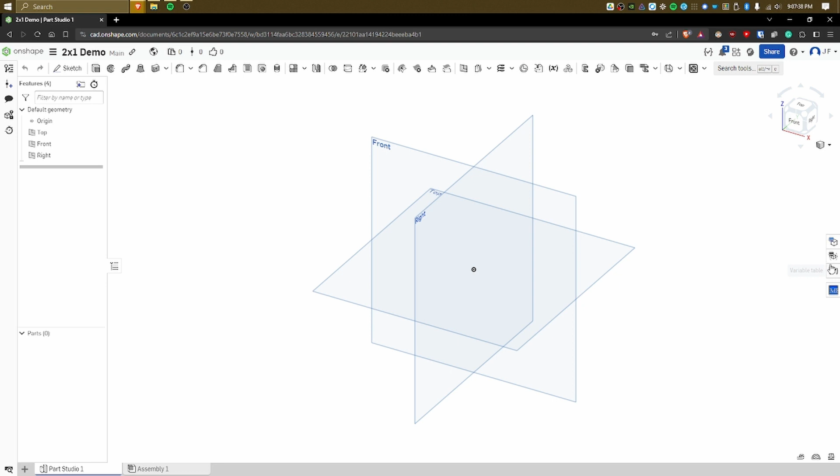The first thing I'm going to start with is coming over to my variable table. I'm going to create three variables: one for width, one for height, and one for length. Now the length, you need to change this to any, and for now let's just say 12. The width, since we're drawing a 2x1 right now, will be 2, and the height will be 1.

And if we want to switch this to a 1x1, we can easily just hop in here and it'll regenerate, and we can make configurations and all that good stuff.

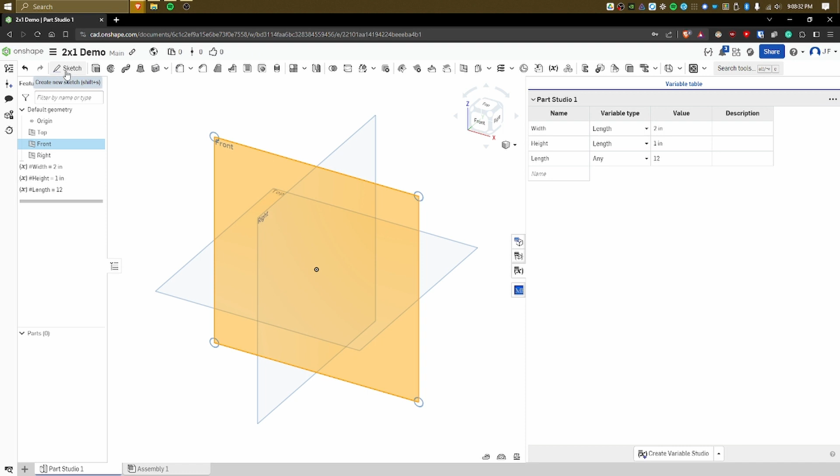So I'm going to start with my front sketch, select it, and hit Shift S or the sketch button in the top left corner, and go with a center point rectangle and draw that out. When you're drawing a 2D sketch, it's a lot easier if you view it normal or perpendicular, so just hit that.

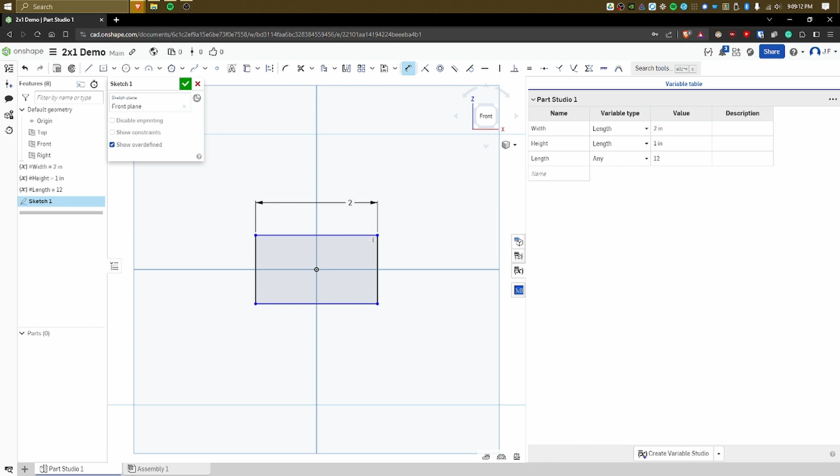Next we have blue lines, so we want these to be fully dimensioned and then they'll turn black, that's how we know everything's fully dimensioned. Hit D on your keyboard, or use the dimension tool at the top, and select the top line. Remember to keep your dimensions neat, you don't want them stacked up, you want them visible.

Okay, now I have all black lines, but now we need to make this a tube and not just a solid extrusion, so I'm going to hit escape to exit the dimension tool.

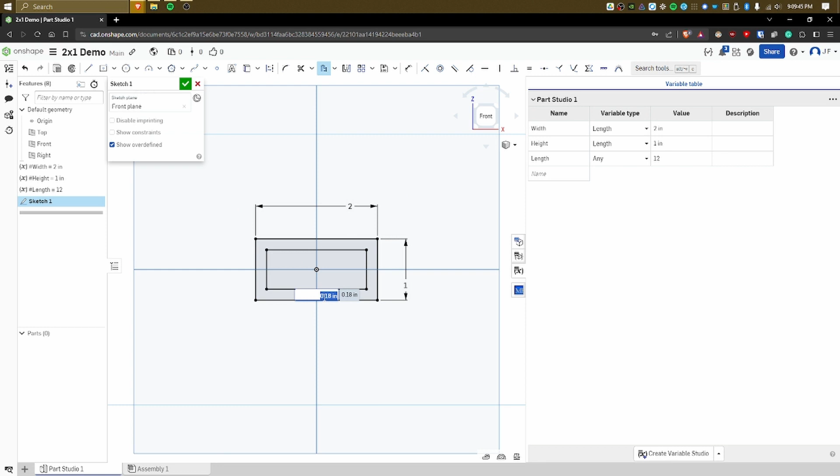Select all four sides and then hit O for offset. Put it on the inside, which is where we want, but if it's on the outside just click this arrow, or you can click and drag to fine tune, and enter in your dimension. We're going to use 1/8, so that's 0.125, and there you go, all your lines are fully dimensioned and black, so you're good.

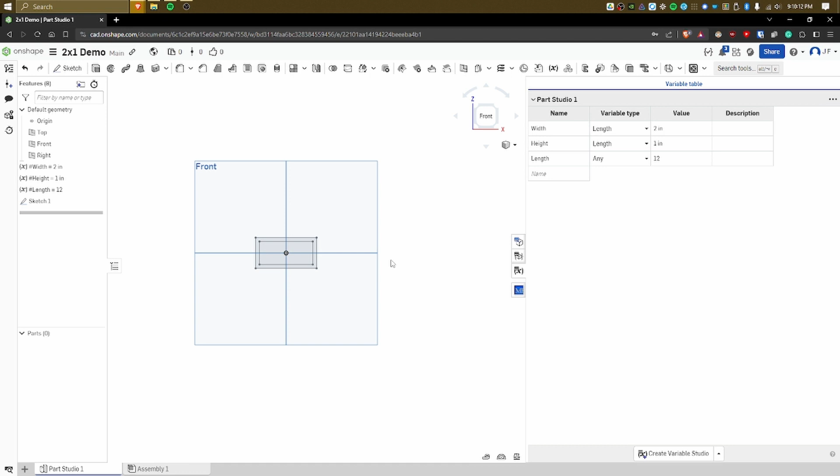Again, I'm just going to pull this out so that it's clean. Okay, all our lines are black, we're fully dimensioned, you can hit the check mark on the sketch. Now what I like to do is hide the planes, so you can press P. And if you want to view it full screen or zoom to fit, just hit F.

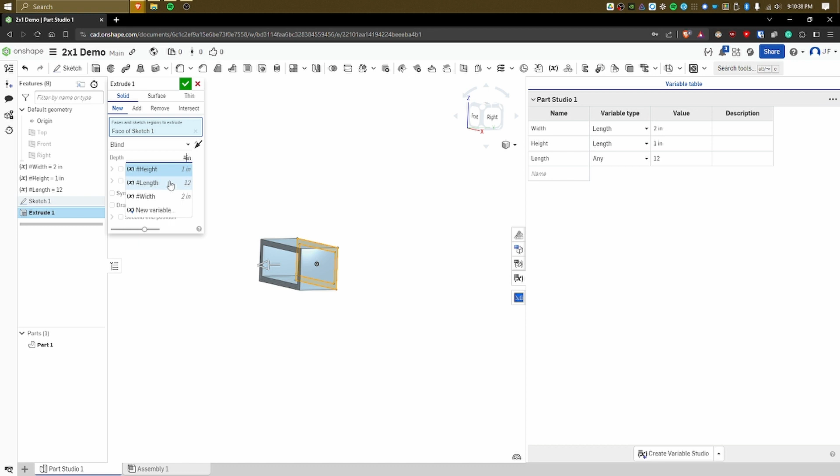Next step is to extrude, that's Shift E, and we're just going to select the outside face. Instead of giving it a hard-coded dimension or depth, we're going to put in a variable. To use a variable, you put the pound sign or hashtag, and then go length. Hit check, and that will automatically update it to 12 inches.

Now if we come over here to our variable table and type in 18, you'll see that this extends. We can go 3 inches, there you go.

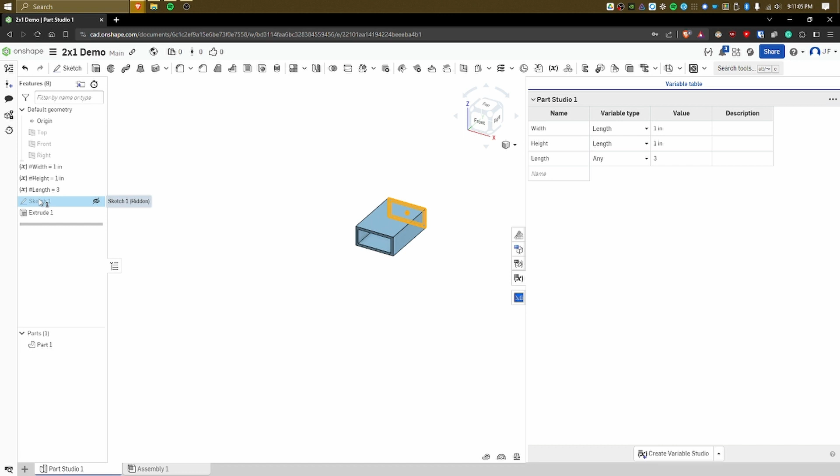So automatically, if we want this to be a 1x1, we'll need to enter our sketch over here and define this. So instead of 2 inches, this is going to be hashtag width. And this one, instead of 1 inch, you don't really need to put a variable in, but for this tutorial I'm going to put in height.

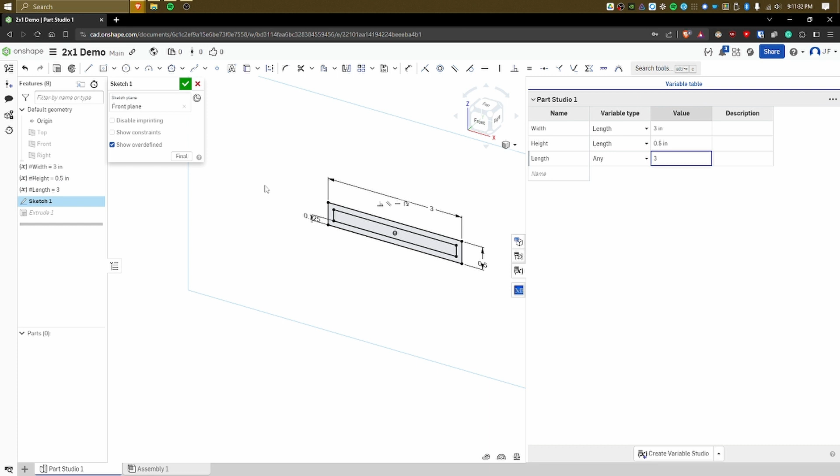Now we can change this to 3, this can be 0.5, and you can see everything updates without having to enter the sketch. So I'll put this back to 2, this one's 1, and you can see without editing any of the sketch you have all your dimensions here that you can edit. This is super handy if you just want to quickly swap between a 2x1 or a 1x1, and your length obviously. So let's keep this at 12.

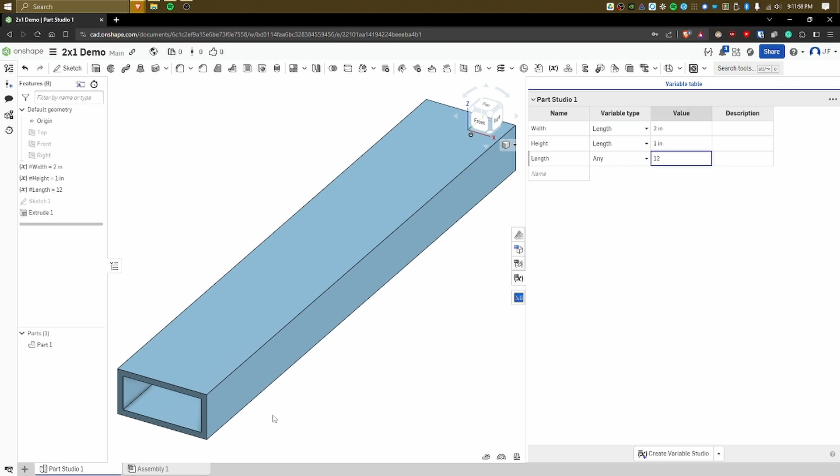Okay, now let's add the holes. We're going to select this face, hit sketch, view right, and start with the circle. See this yellow line comes up, that means I'm centered, and I'm just going to lay one down, this is 0.163. Now it might jump around, that's fine, you can just click and drag.

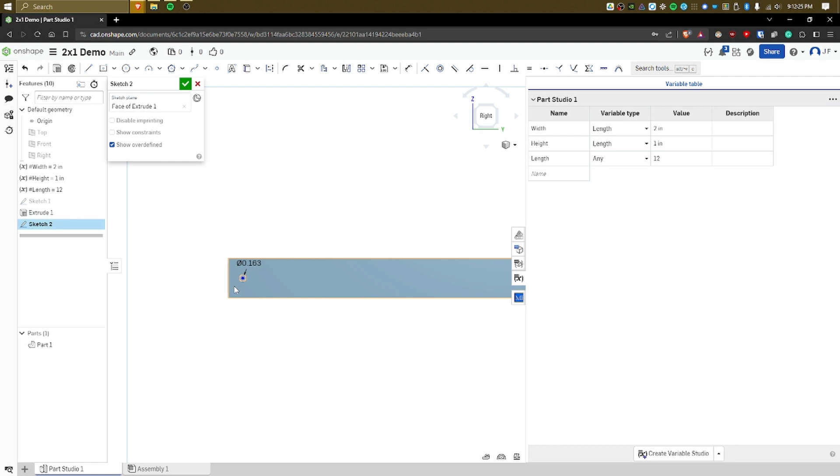Now you'll notice it's locked up and down, that's because that yellow line was already there when we first drew the circle, so now we need to dimension it from the left edge. This is typically 0.5.

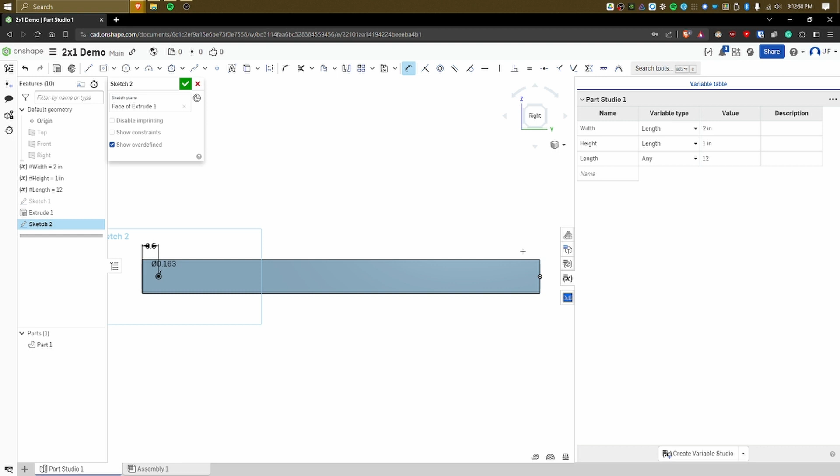And now we want to pattern it across all the way. A good trick I like to teach is that if you have half an inch from this end, half an inch from this end to the next hole, and 1 inch in between, then the number of holes is directly proportionate to the length of this piece. So if your length is 12, you'll have 12 holes.

You want to go to the pattern tool, then click this, and for the count we want that to be length. So you can see here it copies out 12 of them, and your spacing should be 1 inch. Hit check.

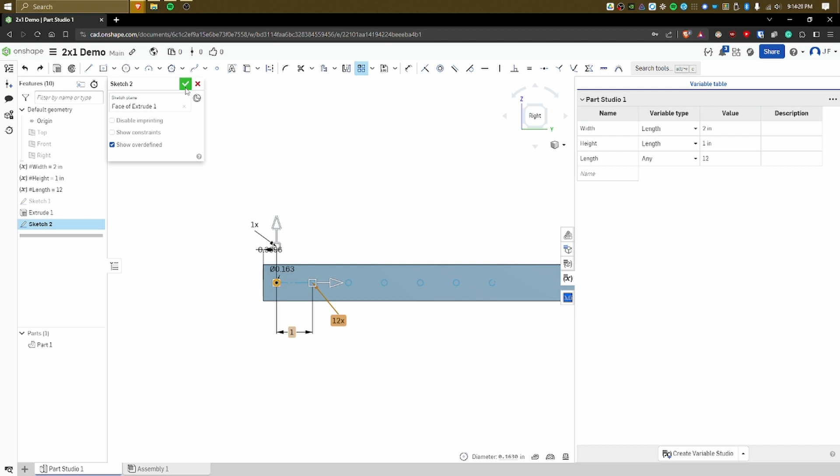Now if I come over here and update length to, let's say, 28, you can see that it patterns 28 times. So everything updates nice and quick. Okay, perfect.

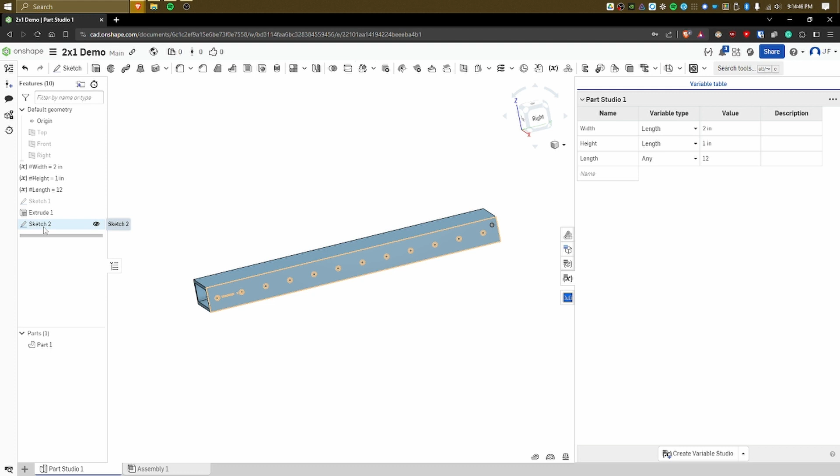So I'm going to click on my sketch. We want to cut all these holes through, so sketch, extrude, and go to the remove tab, custom material, and change blind to through all. Hit check, and there you go. You are good.

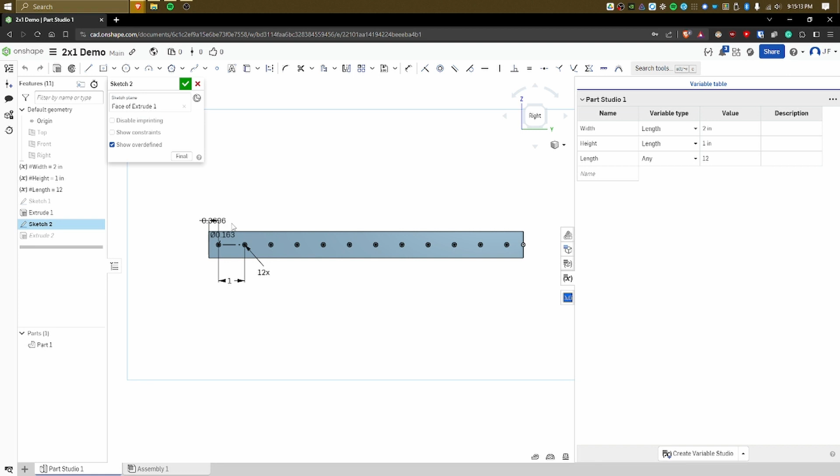And that's your part. So now if you come over here to the length, you can say, okay, I want this to be 59 inches - they come in 59-inch lengths typically. There you go. You can put it into 4 inches. You can make this a 1 by 1, and everything updates nicely.